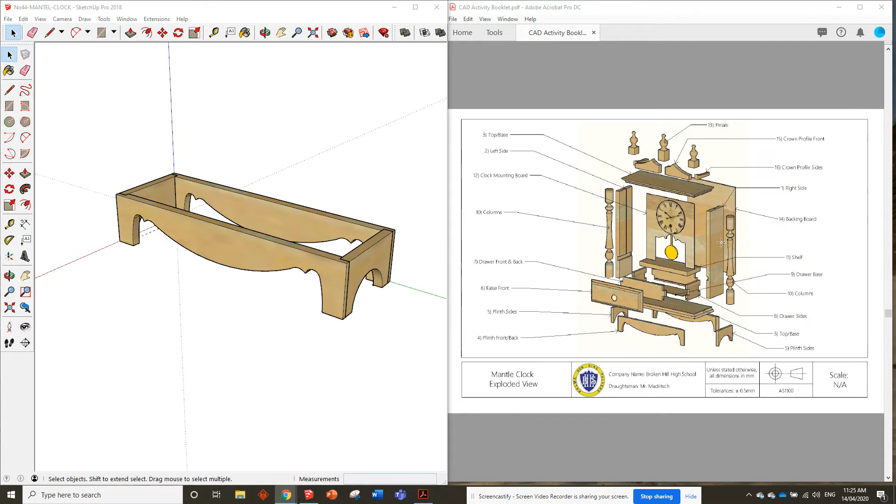The next thing we're going to do is use drawing number 3 for the top and base. You can see here we've got a base and a top, they live there and there when the clock's finished, so that's a pretty easy piece to put on. We basically just draw a big rectangle and need to put a decorative edge on it like this. So let's get straight into it, we've got a piece of timber: 140 wide, 19 millimeters thick, and 400 millimeters long.

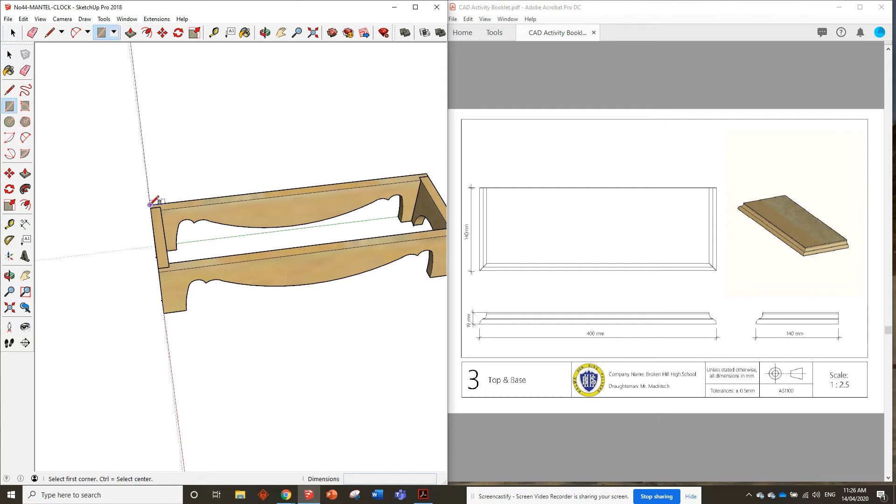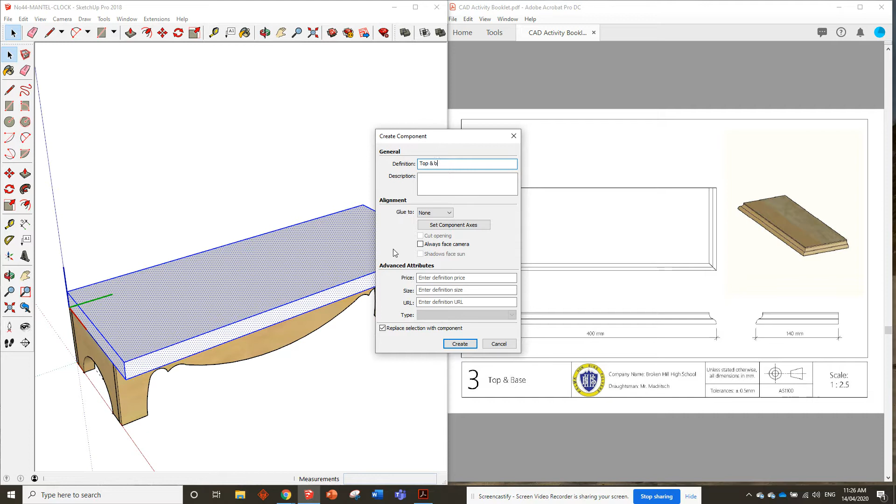So we've got our plinth here. We probably want to draw it slightly away, but we can just draw it on top for now and move it later. So we need to go 140, 400, like that. Oops, that's the wrong way. We need to go 400, 140, that's better. Okay, and we'll push it up by 19 mil. Then, like always, triple click, right click, make component, and we call this top and base. There we go. Okay, so we've got that component sorted.

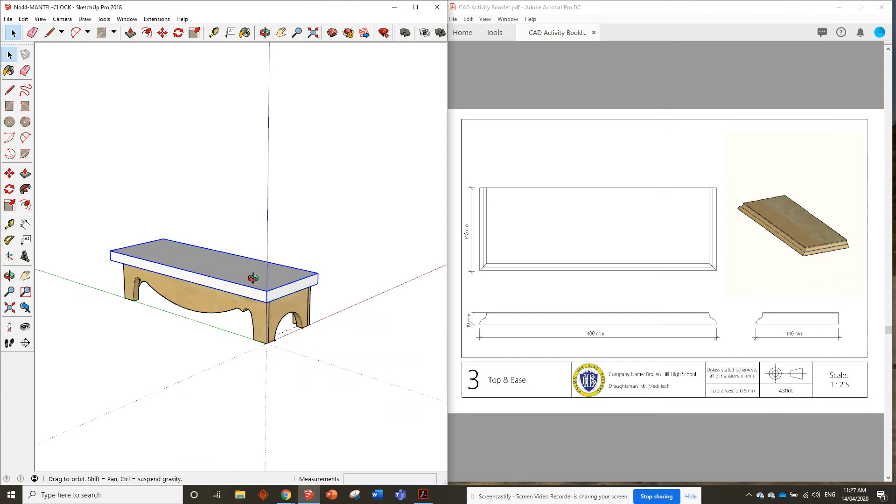Now, we can see here, because this mantle clock is going to go up against a wall or something, we've only got the decorative, or routed edge, on 3 sides. We've got it on these 2 and the long edge, so there's nothing on the back. So this is the back edge here, right? We're going to double click on it, and we need to draw that sort of decorative routed edge that we want.

So we can see here, we need to draw that kind of design onto our edge here. Then we can use the follow me tool, which we've used a couple of times before, and just push it all the way around the edge. So to do that, there's heaps of different ways, heaps of different sort of routed edges you can put on - ogee bits, chamfer bits, all sorts of different decorative edges. Sometimes they can be a little bit tricky to draw in SketchUp. There's a lot of tape measuring and drawing in arcs and circles and stuff.

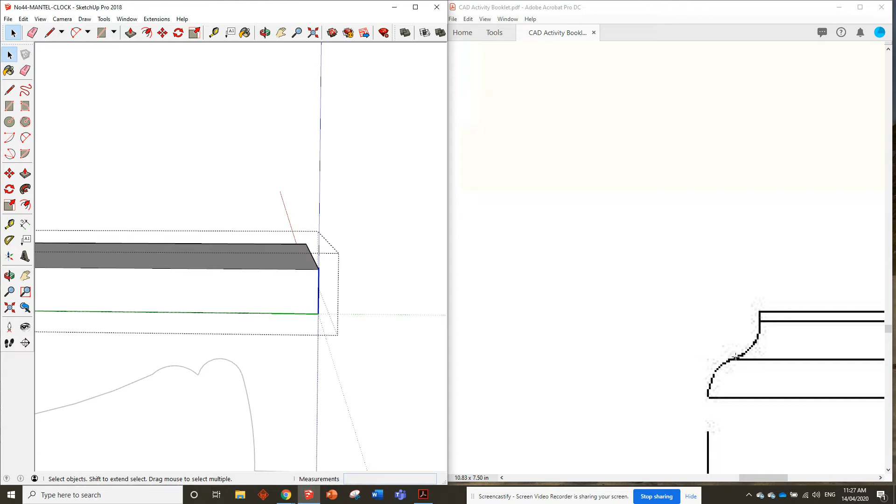But I think for now, it might be easiest just to copy this one. So we can see we've kind of got a quarter circle here, I guess you could say, from that bottom corner. I might draw it on this side, so we're doing the same thing - a quarter circle from here to there. I reckon, if you ask me, that looks like that piece is 8 millimeters.

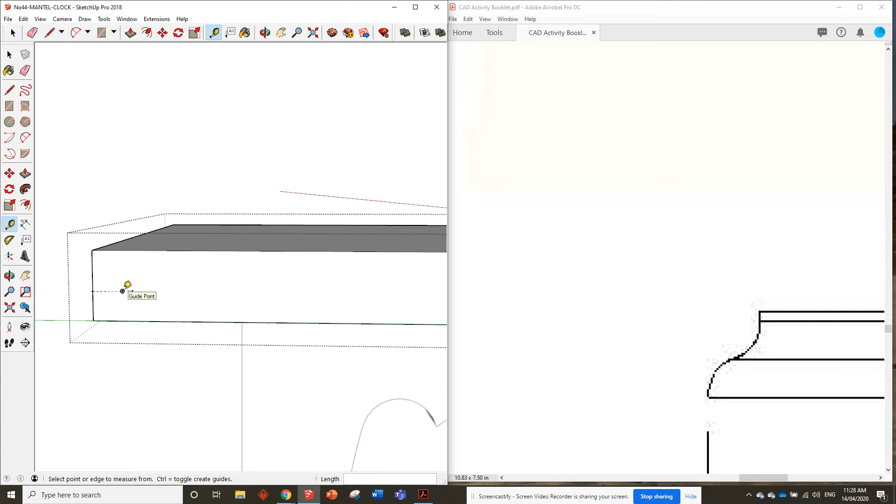I reckon that might be 8 millimeters up, so let's go 8 up and 8 across. And then we might need to go - how can I draw that quarter circle in? I'll need this point as well, so I need to go 8 down. And then we go to the arc tool, from here to there and up like that. Okay, so there's that first quarter circle.

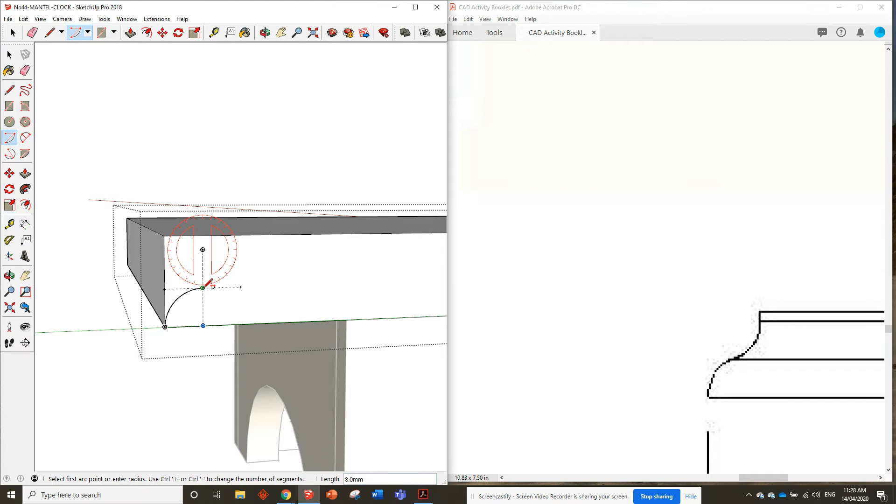Then we need another 8 by 8 by 8, I think. So we go 8 millimeters this way, 8 millimeters up, and we get the arc tool from here to here, quarter circle. Okay, so that's that bit done. That looks pretty good. And then it looks like we just got a straight up edge there.

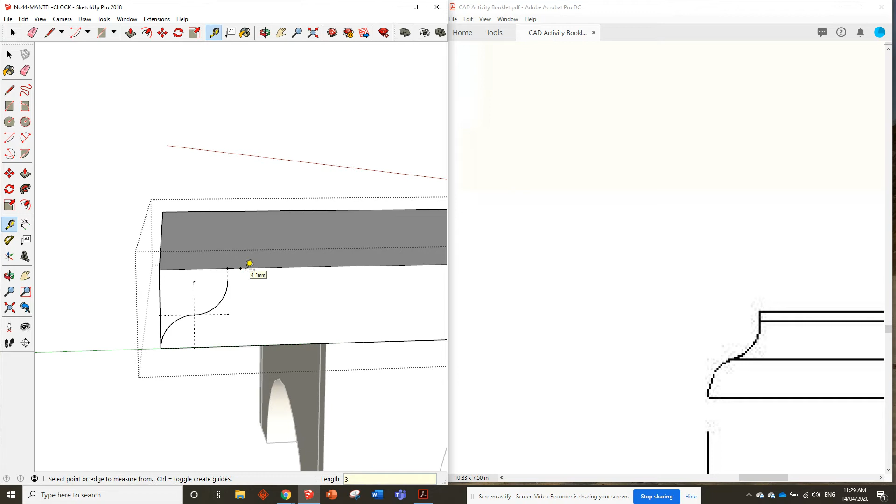If we want, we could maybe decorate it a little bit further - we could maybe put a little chamfer on. So if we go up there, we've got 3 millimeters, so we'll go 3, and 3 across this way. Then we can put in a pencil line from here to here, and that gives a little chamfer on the edge, just a bit of extra decoration. Don't need to do it, but it's up to you. And you don't need to do this kind of curve design if you don't like it - you could do something completely different if you want.

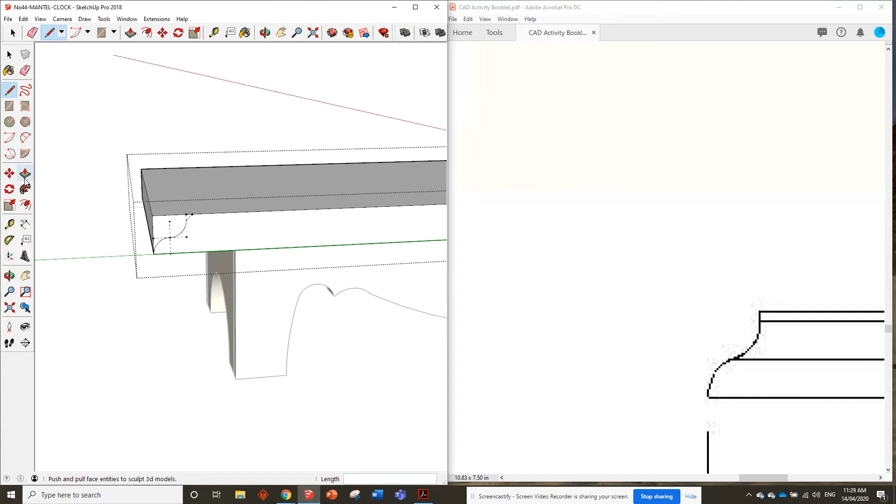That's just a nice, easy one I thought we'd do. At the end of the day, it doesn't really matter what shape you draw here, because in the workshop you're going to be using one of the router bits you have available. In the drawing, it's just to signify to the person reading it that there is a routed edge on this piece of timber. So it doesn't matter if it's not the exact bit you're going to be using in the workshop.

So we grab the follow me tool. We're going to click on that face, follow that line all the way around to here, click, and that's it. So it's put that routed edge on for us.

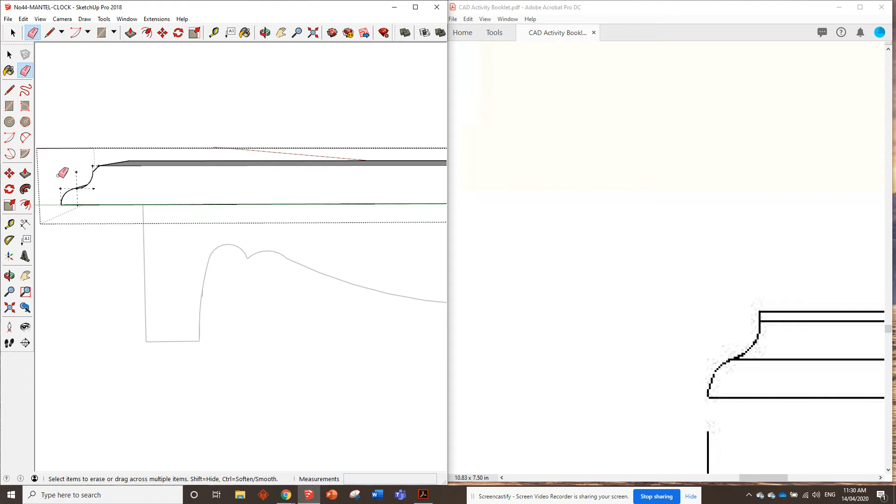All we need to do is erase. Sometimes it gets rid of them, sometimes it doesn't, I don't know why. Erase those two lines. So, if we look from the front, that was pretty nice, I like that. Okay, now we need to leave the component. We will edit, delete the guides, just like that.

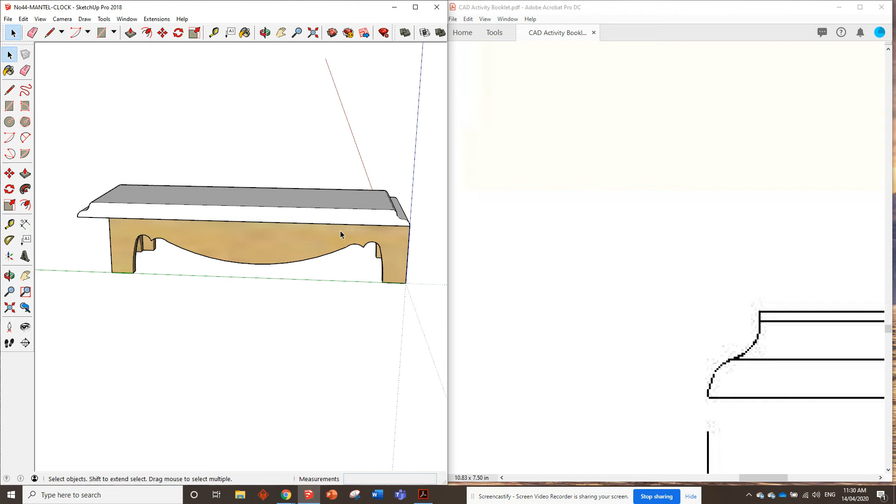Then we need to, this is the base, it needs to sit perfectly in the center of the plinth and be flush with the back. You can see here it's going to hang over at the front, but we want it perfectly flush with the back like it already is. So we just need to move this base piece across that way.

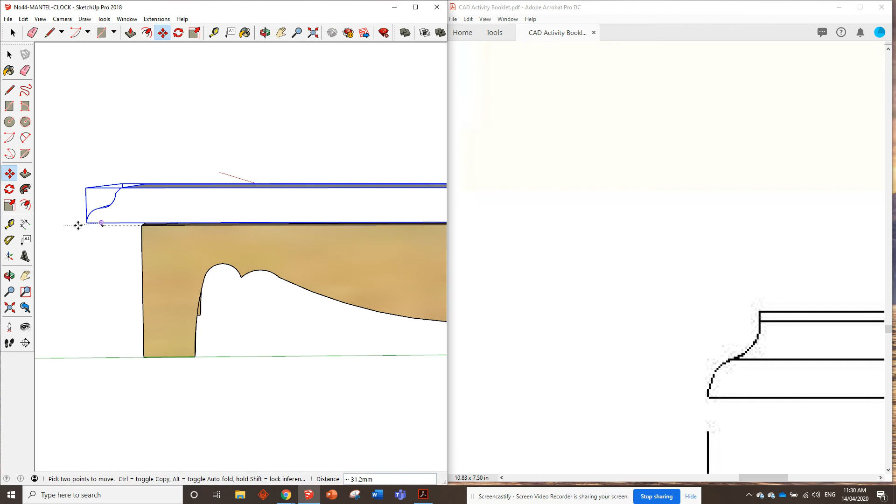So to figure out how far, all we need to do is measure the distance from the end point here to that corner there, which is 40 millimeters. That means we need to divide that by 2, so that'll be 20. We're going to grab the move tool, grab the bottom corner, and move it to there. That way, we'll have 20 millimeters overhanging here, 20 millimeters overhanging there, and that will be perfectly in the center. Okay, so that looks pretty good.

We can paint that. Paint, good. And then we need to make a copy of it for the top one as well. So making the copy is easy, but figuring out exactly how much higher to make it is probably going to be the tricky part.

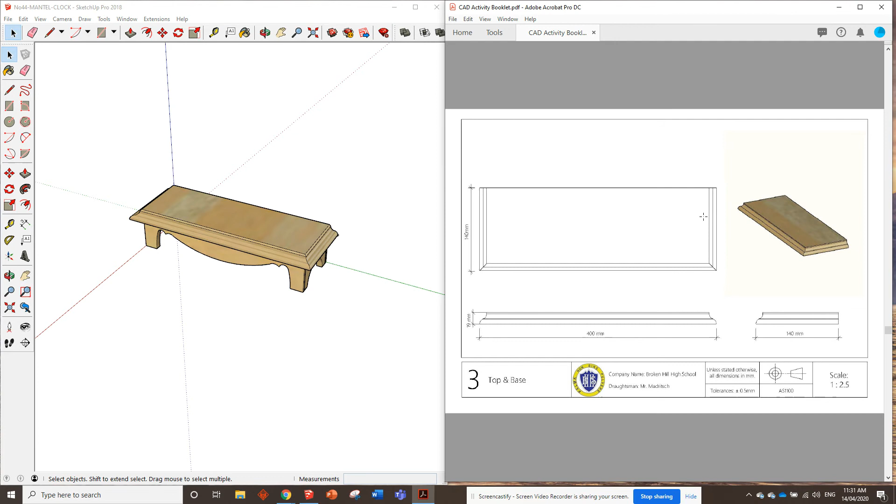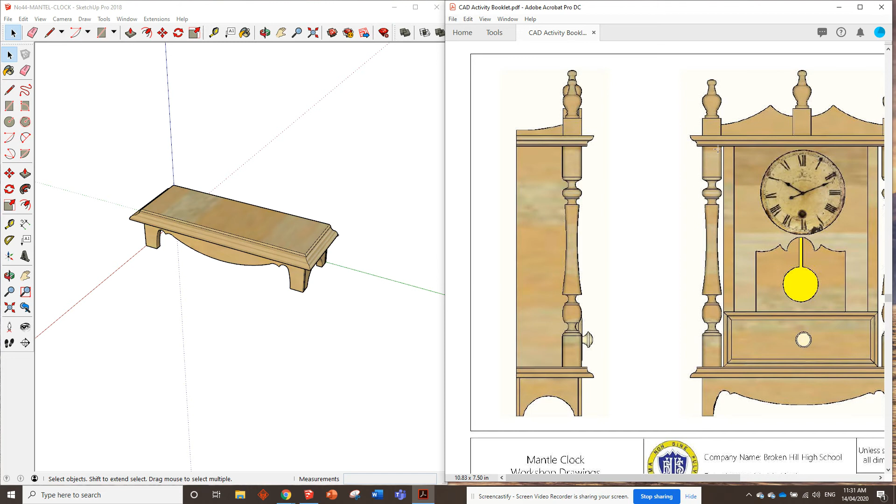Let's look back to the original drawing. We can see that the top piece is actually upside down, so the profile's on the underside. So we're going to need to flip this upside down as well as move it up, a distance that is the length of this side piece here, so that the top piece sits on top of the sides. If we go to the side piece, we can see that's 400 millimeters long. There has to be a 400 millimeter gap between these two.

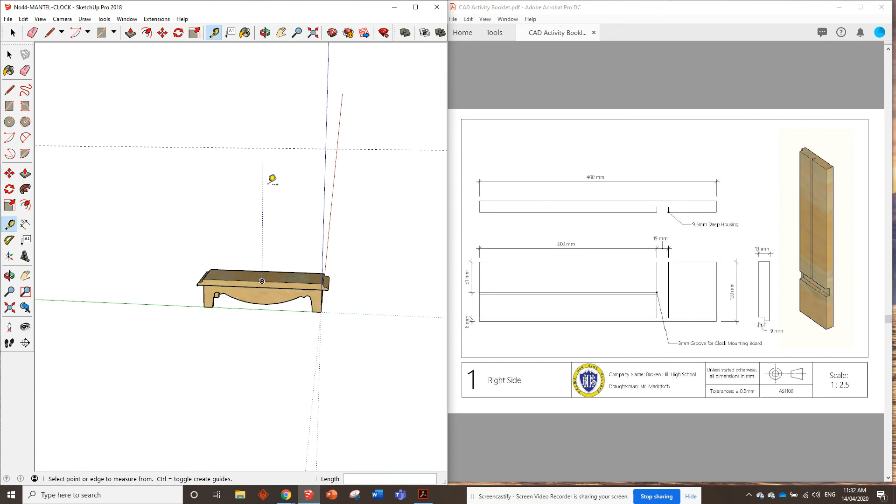The easiest way to do that would probably be to grab the tape measure from the midpoint here. We'll go 400. Does that work? Yep, there we go. So let's grab the move tool. We're going to click on this piece, press control first, then click on it, and move it up.

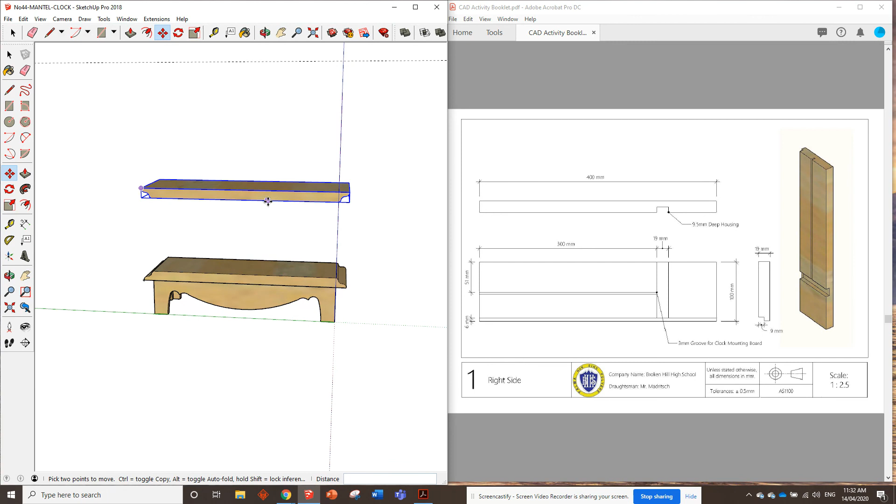Then we'll grab this little node here and rotate it like that, so we've got the routed edge on the underside, just like that. And then we'll grab this bottom edge here, and we want to push it up on the blue axis until we hit that tape measure line. See, it says on line there. That's perfect, that means there should be a 400 millimeter gap between these two now.

Okay, so that's the top and base piece done. Next video, we'll make these sides. There's a little bit to do on the sides, a couple of grooves and stuff we've got to put in, but we'll do that in the next video. Okay, good stuff, guys, see you in the next video.